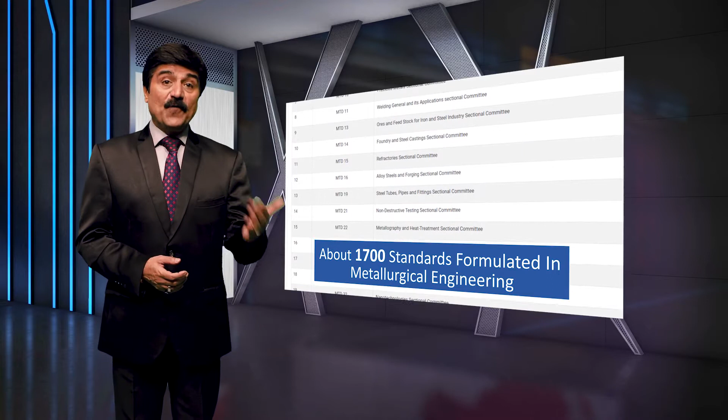Do you know about the standards specified for channels, beams, angles, rounds and other such products used in the construction industry? These products fall under the category of ferrous metallurgy. Let us take a look at the list of some important standards formulated in this category.

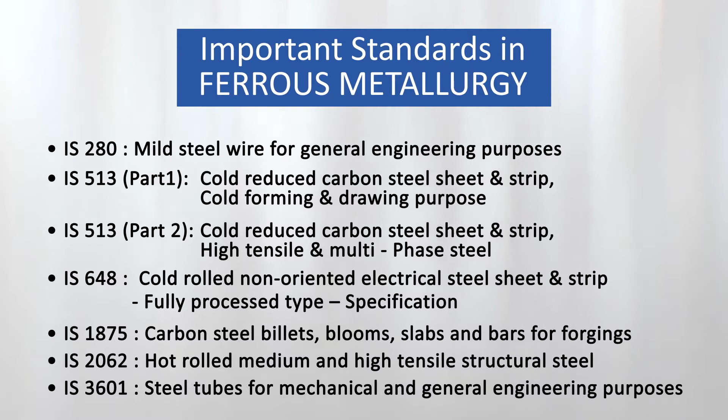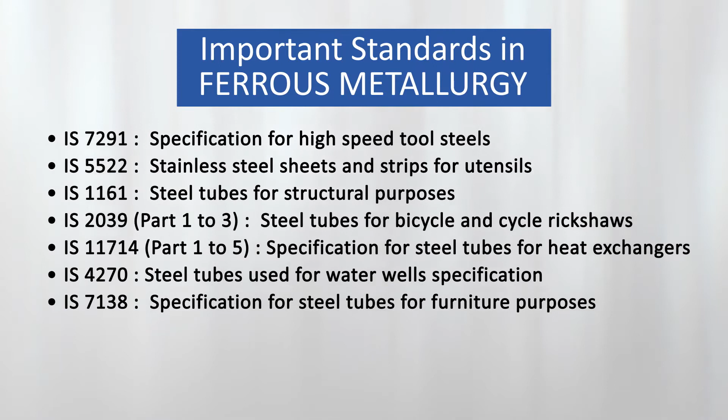Now let us hear from Shri Arun Puchakayala, scientist BIS, who talks about some of the standards in this category.

In the category of ferrous metallurgy, the standard IS 1239 Part 1 for steel tubes of sizes ranging from 6 mm to 150 mm covers the requirements of welded and seamless tubes intended for use in supply of water, non-hazardous gases, air and steam. The standard specifies requirements for chemical composition, mechanical properties comprising tensile strength, elongation, flattening test and bend test, and dimensional tolerances of pipes.

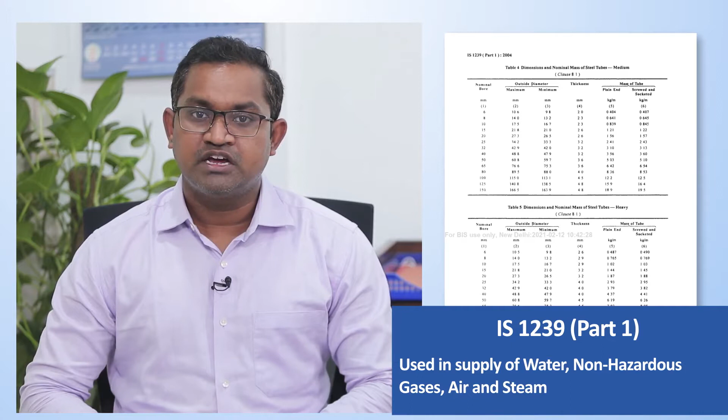This standard covers black pipes and galvanized pipes with enhanced resistance for corrosion, which can be supplied with either one or both ends socketed, with or without screw threads.

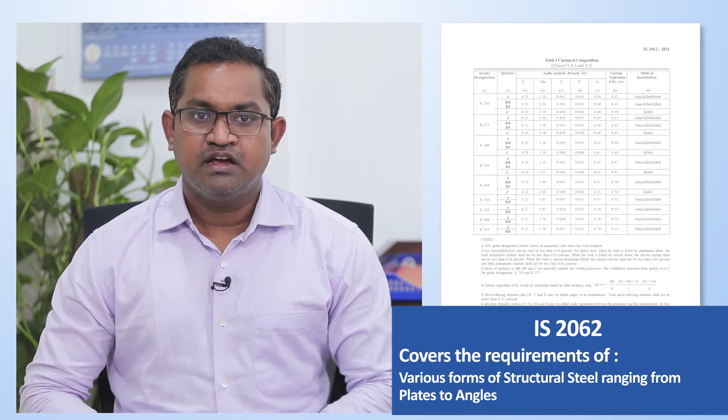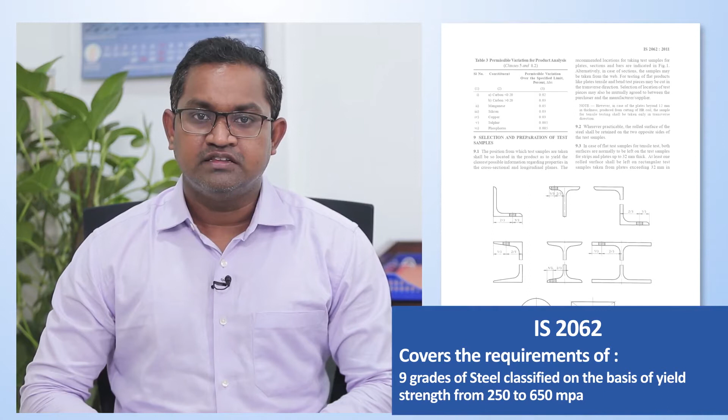Another standard, IS 2062 for hot rolled medium and high tensile structural steel, covers requirements of structural steels in various forms ranging from plates to angles. The standard prescribes chemical composition, mechanical properties comprising yield strength, tensile strength, elongation, bend test and impact test, and dimensional tolerances for 9 grades of steel classified on basis of yield strength ranging from 250 to 650 megapascals. These grades are also subclassified on weldability with improving quality from A to C.

This standard, IS 6911 for stainless steel sheet and strip, comprises steels resistant to corrosion and heat through addition of alloying elements with chromium as the principal alloying element. The standard specifies chemical composition, mechanical properties and dimensional tolerances for various grades of stainless steel, mentioned both on basis of designation and numerical symbols prevalent in industrial parlance.

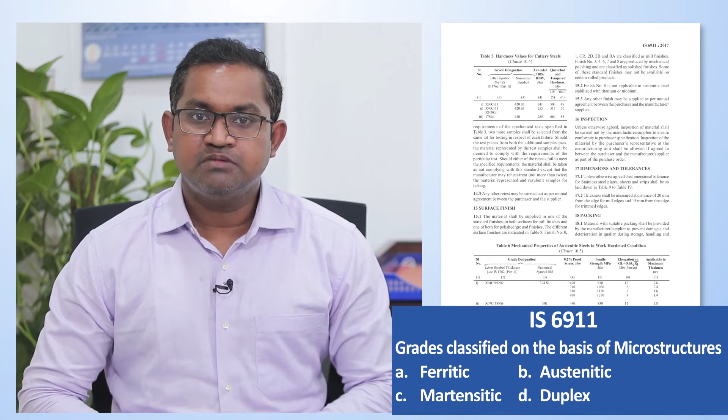The grades mentioned in the standard are classified into 4 types on basis of microstructure: ferritic, austenitic, martensitic and duplex, which can be supplied in different finishes catering to industry segments comprising food and catering, chemical and pharmaceutical appliances, medical equipment manufacturing, and architecture and construction.

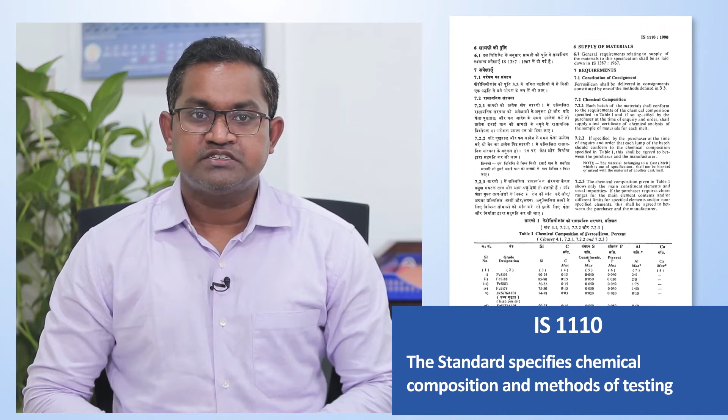The standard IS 1110-1990 consists of 12 grades of ferrosilicon, which is an alloy of iron and silicon with a typical silicon content by weight of 15 to 95%, used in production of steel. The standard specifies chemical composition including reference method of test for determining composition. In addition, it also subclassifies the product on basis of size designation besides defining lots on basis of homogeneity of heat in mixing the product for supply.

Let us have some more details about the standards from Shri Manish Kumar, one of the leading manufacturers of ductile iron pipes used for carrying water and gas. He is also a member of the technical committee that has formulated these standards.

As a pipe manufacturing company, our 2 main products are ductile iron pipes and mild steel pipes. They are primarily used in India for water application, wastewater application and oil and gas application. For the ductile iron pipes, we use IS 8329, which is the mother standard for the product. Then we use IS 3589, which is for the mild steel pipes. So these are the basic product standards for the two products I mentioned, ductile iron and mild steel.

But for each product there are other standards. To explain, I'll briefly give the references. For example, when we use the ductile iron pipe standard IS 8329, we also have to use reference standards, for example the laying standard of ductile iron pipes. Then we have to use standards for measuring different parameters within the dimensions of the pipes, sampling of the pipes, inside lining, outside coating, and the relevant standards applicable to these linings and coatings. Similarly for mild steel pipes, the mother standard IS 3589 gives the product's dimensions and relevant parameters, but for each type of lining and coating, various other related standards are also used.

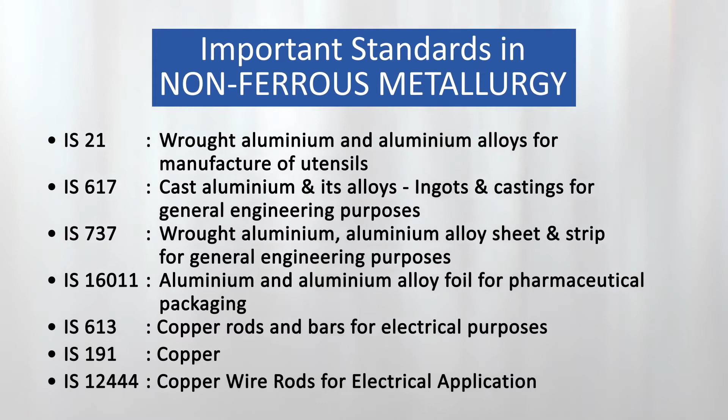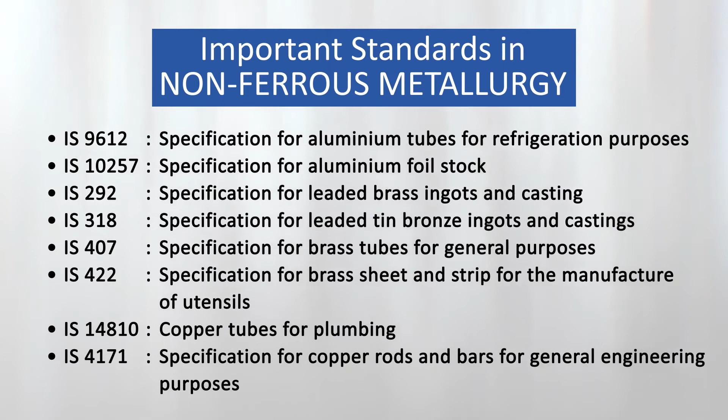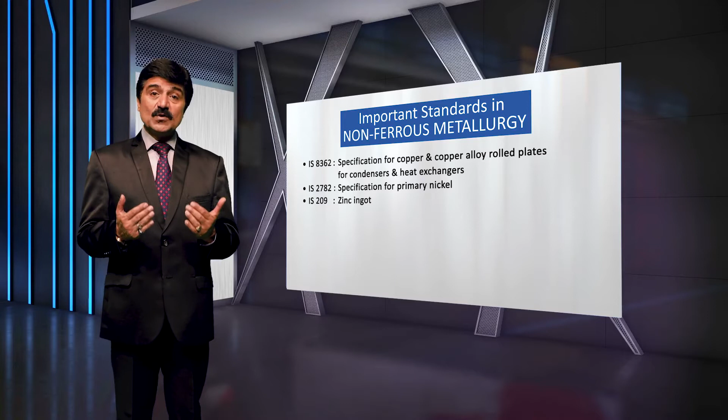However, do not think that metallurgy is all about ferrous products and its alloys only. There are many important standards and applications of non-ferrous products as well. A total of 215 standards have been formulated in the non-ferrous sector, comprising aluminium, copper, zinc, tin, nickel, lead, titanium, etc. These standards are used for manufacturing various electrical and food packaging products, corrosion protection and other applications. Now let us hear from Sri Ashok Kumar, Scientist at BIS, about some of the prominent standards in non-ferrous metallurgy.

Let me tell you about some of the important standards in the category of non-ferrous metallurgy. The standard IS 15392 for aluminum and aluminum alloy bare foil for food packaging specifies the requirement of aluminum foil used for food storage and packaging.

The standard contains the requirement of pinhole count, preferred thicknesses, dimensional tolerances, foil response to stress, and test of surface condition of the product for safe packaging and prevention of food from contamination.

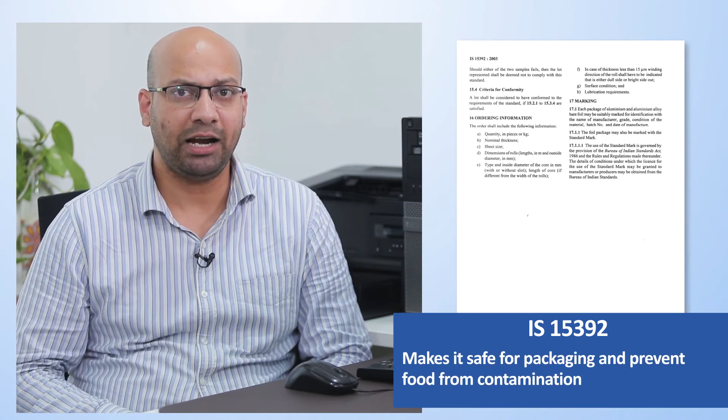The standard IS 12444 for continuously cast and roll electrolytic copper wire rod for electrical conductors covers the requirement of electrical conductor grade copper rod up to 18 mm in nominal diameter, produced by continuous casting and rolling for electrical round and rectangular conductor. The standard IS 21 for wrought aluminum and aluminum alloys for manufacture of utensils specifies the requirement of various grades of wrought aluminum and aluminum alloy sheets and strips used in the manufacture of aluminum utensils.

The standard contains the requirement of bend test, tensile test, and supply condition of grade of material used for making utensils. Another standard IS 13923 for lead seal specifications covers the requirements of the lead seal for sealing purposes.

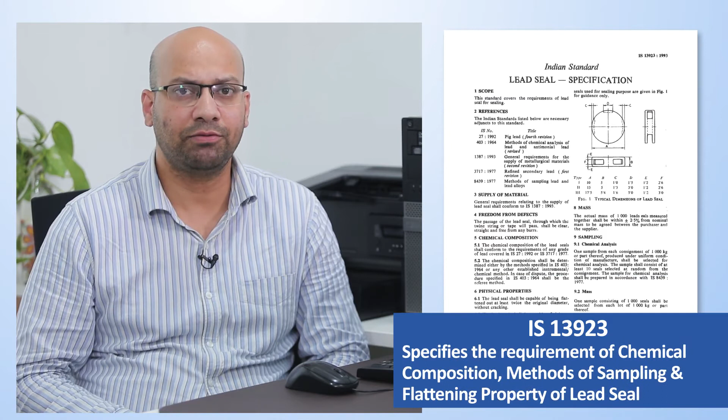It specifies the requirement of chemical composition, method of sampling and flattening property of the lead seal. For guidance purposes, the standard also specifies the typical dimensions for the lead seal used for sealing purposes.

I hope by now you know about the standards of many products made out of metals and their alloys that are used in our day-to-day life. Now let's talk about standards relating to various processes of metallurgical engineering.

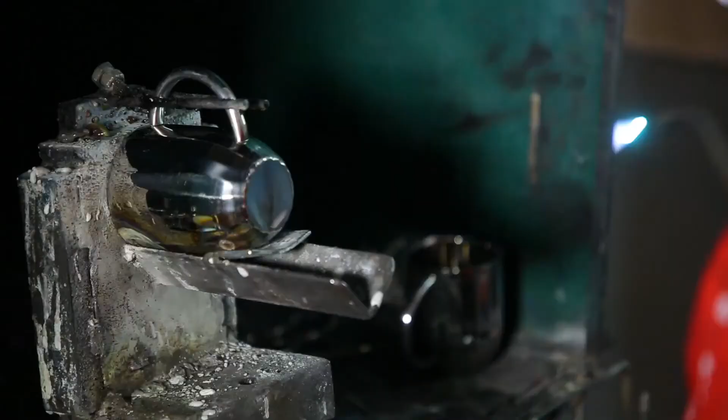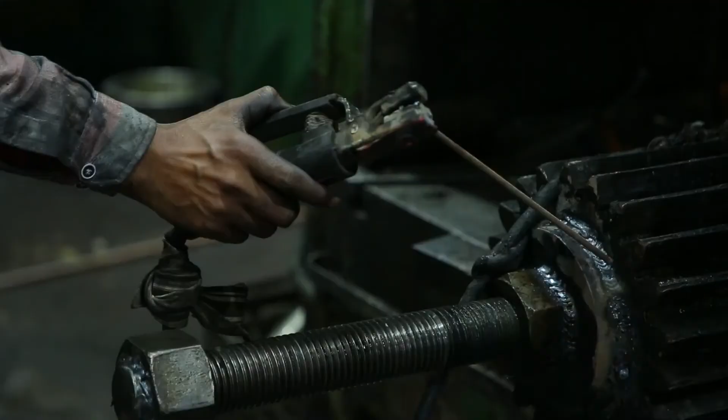One such process is welding technology. Welding is a metal joining process and is used in fabrication industry. Welding electrodes are used to fuse two metal pieces together. Depending upon the process of welding, the electrodes are either consumable or non-consumable.

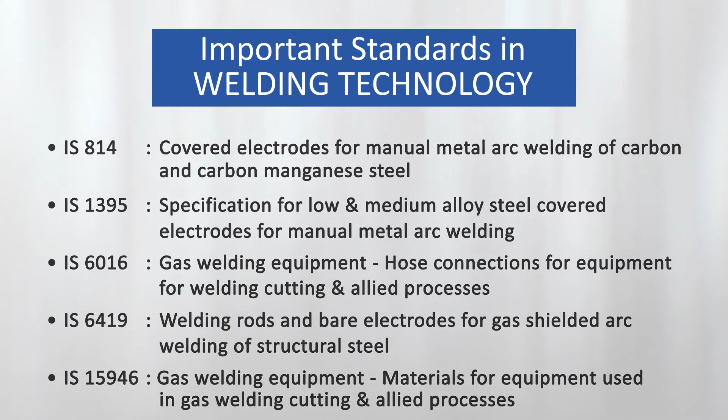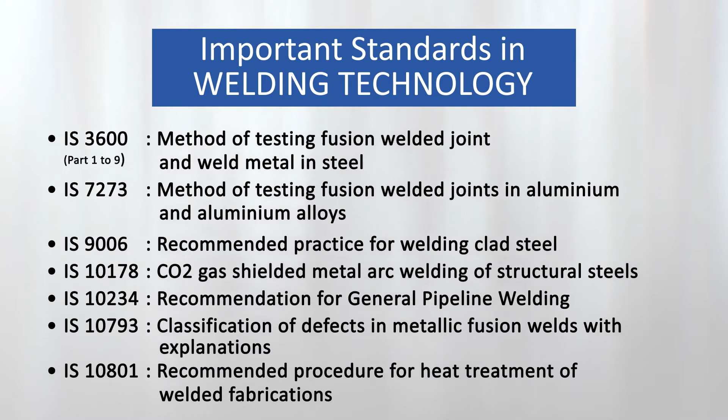BIS has formulated 111 standards in the welding category relating to jointing processes, materials and equipment used in jointing, training and safety of personnel, recommended procedures, method of tests for joining two or more similar or dissimilar metals by use of heat, pressure or both.

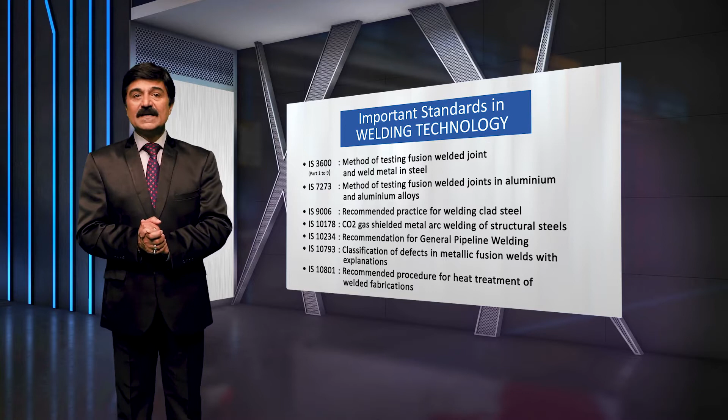Let us now know about some of the prominent standards in this sector from Shri Ram Sai Kumar, Scientist BIS. I am going to give the brief introduction of important standards in welding technology and applications.

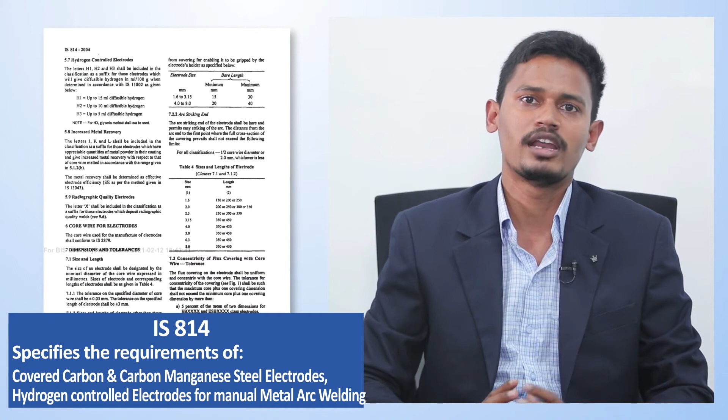In this category of welding technology, the Indian standard IS 814-2004 specifies the requirements for covered carbon and carbon manganese steel electrodes, including hydrogen controlled electrodes for manual metal arc welding of mild and medium tensile steel, including structural steels, and depositing weld metal having a tensile strength not more than 610 MPa.

The requirements include tensile strength, elongation, impact properties, dimensions and tolerances, chemical analysis and bend test. The standard also gives the information of weld slope, position and rotation.

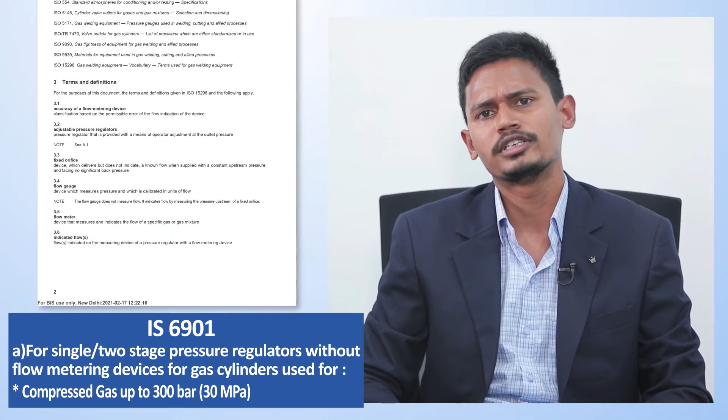The Indian standard IS 6901 for gas welding equipment specifies requirements for single and two-stage pressure regulators without flow metering devices for connection to gas cylinders used for compressed gases up to 300 bar, dissolved acetylene, liquefied petroleum gases, methyl acetylene, propadiene mixtures and carbon dioxide.

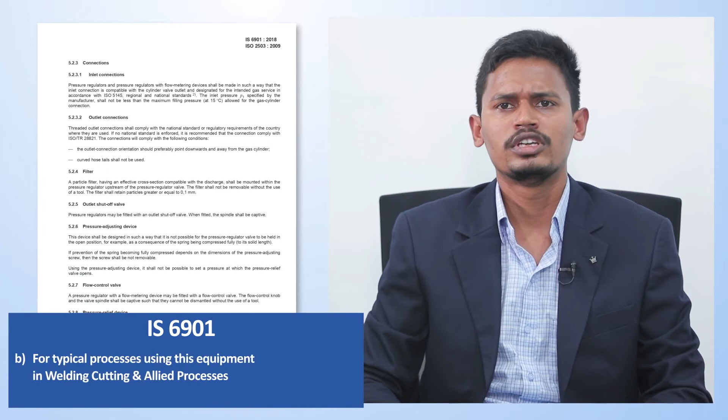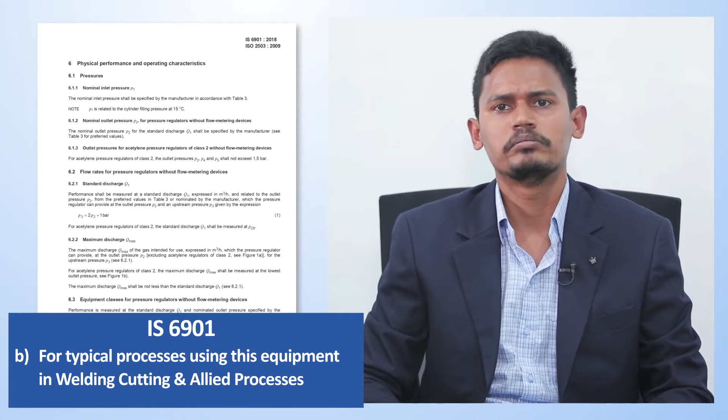For use in welding, cutting and allied processes, typical processes using this equipment are tungsten inert gas arc welding, metal inert gas arc welding, metal active gas arc welding, plasma arc welding, tubular cored wire welding and plasma cutting.

Another standard IS 6419 prescribes the requirement of solid filler rods and wires for structural steels by tungsten inert gas arc welding (TIG), gas metal arc welding or CO2 welding process. The chemical composition and mechanical properties of the filler wire and the rods are also specified.

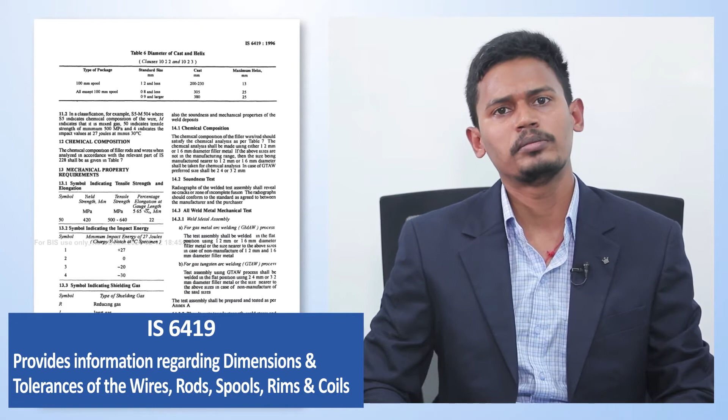IS 6419 provides information regarding dimensions and tolerances of the wires, rods, spools, rims and coils. It also prescribes mechanical properties requirements, tests for filler materials and chemical composition of the filler rods and wires.

Well, that was quite interesting to know, and I'm sure that the information disseminated here will be of tremendous value to you. Now let us move on to the Foundry Technology category.

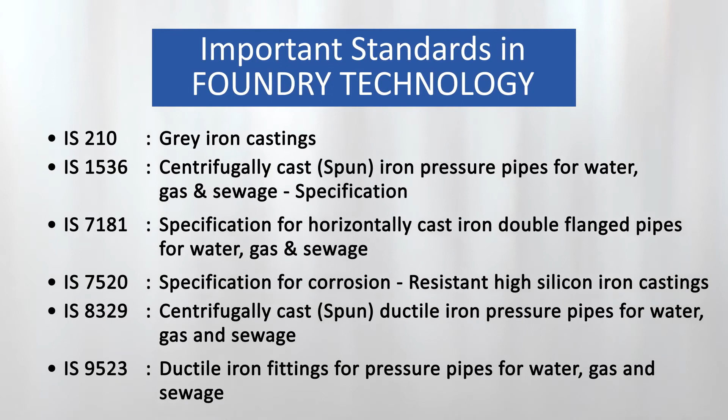Indian standards formulated on Foundry Technology comprise 165 standards on metal castings for various applications and materials used for casting, such as foundry sands, mold boxes, patterns, cores, etc.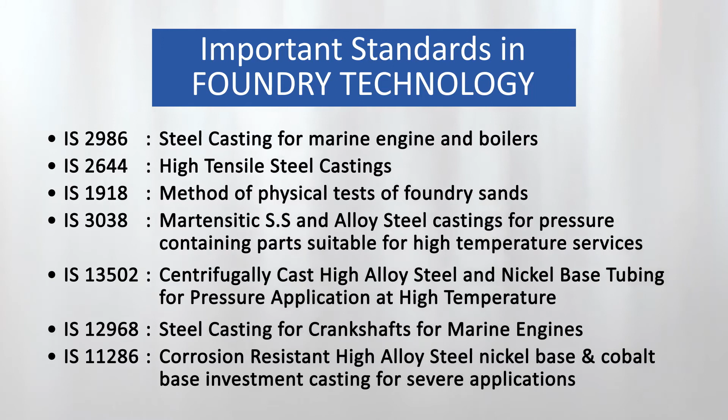Now let us hear from Shri Saqib Rahi, Scientist BIS, about some of the prominent standards in Foundry Technology. Let me tell you about some of the important standards in Foundry Technology category.

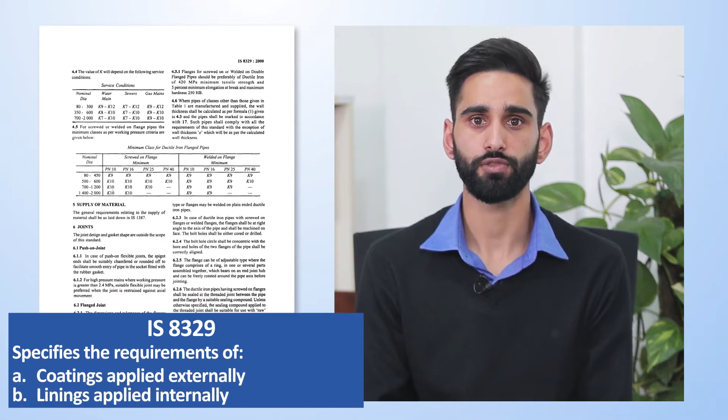IS 8329 for centrifugally cast ductile iron pressure pipes used for water, gas and sewage applications. This standard stipulates the requirements for tensile test, hardness test, hydrostatic test, dimensions and tolerances. The standard also specifies the requirements of coatings applied externally as well as the linings applied internally on the pipes.

The standard IS 1879 for malleable cast iron pipe fittings covers requirements for 14 types of threaded malleable cast iron pipe fittings for general purposes for the transmission of fluid and gas up to the certain limit of pressure and temperature specified in this standard.

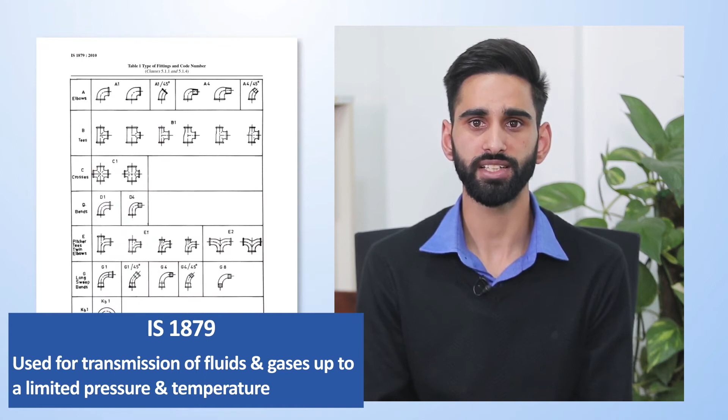This standard stipulates the requirements of pressure test for leakage testing and compression test to judge the malleability of the pipe fittings.

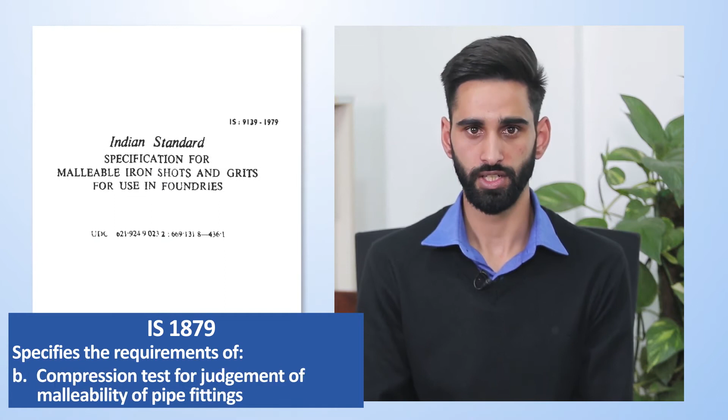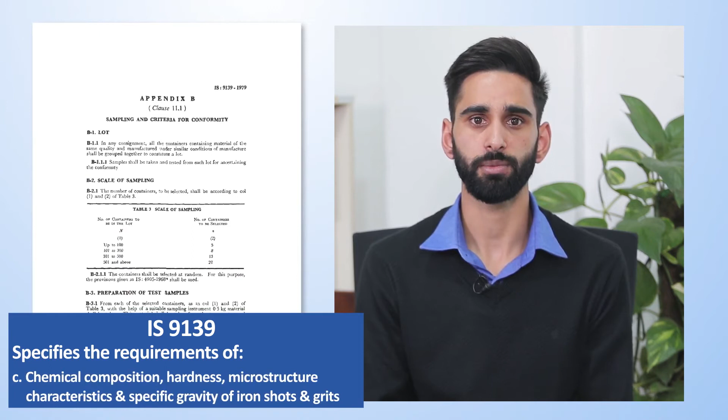The Indian standard IS 9139 for malleable iron shots and grits for use in foundry stipulates the requirements of malleable iron shots and grits as shot blasting machine abrasives. The standard covers requirements for designation of the size of grits and shots based on proportions retained and passed through sieves. It also mentions requirements of chemical composition, hardness, microstructure characteristics and specific gravity.

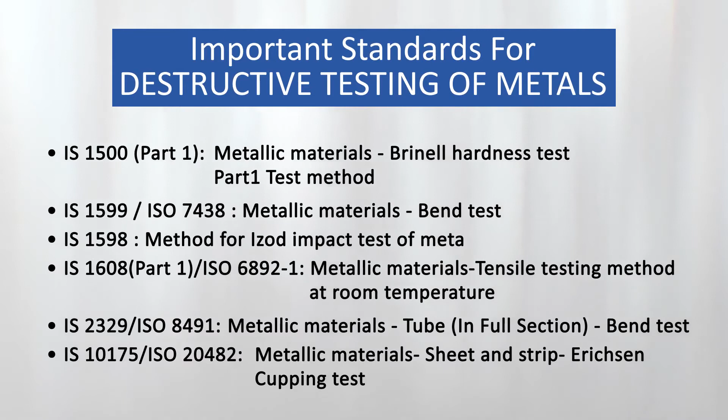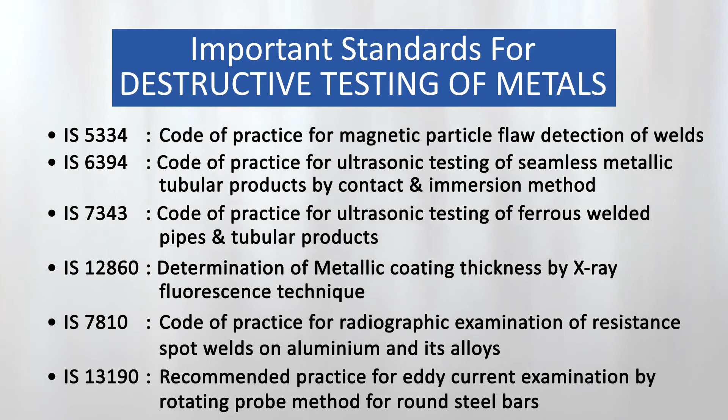After Foundry Technology, now let's talk about testing of materials. It's quite interesting to know that BIS has formulated standards on testing of metals too. 357 standards have been formulated in this category covering mechanical testing of metals, metallography, non-destructive testing, chemical analysis of metals, and code of practices on sampling and sample preparation.

Now let us hear from Sri Akshay Kaushik, scientist BIS, about some of the prominent standards on testing of metals.

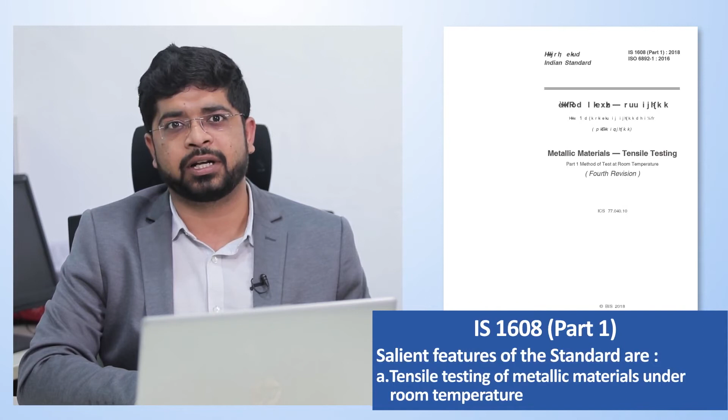In the category of testing of materials by destructive and non-destructive methods, the Bureau of Indian Standards has published many standards. IS 1608 Part 1 is the specification for tensile testing of metallic materials under room temperature. Tensile properties of materials such as yield strength, tensile strength and elongation are useful to determine their mechanical performance, vis-a-vis furnishing limits for designing structures. Tensile strength is measured by elongating a specimen in a UTM, that is, Universal Testing Machine.

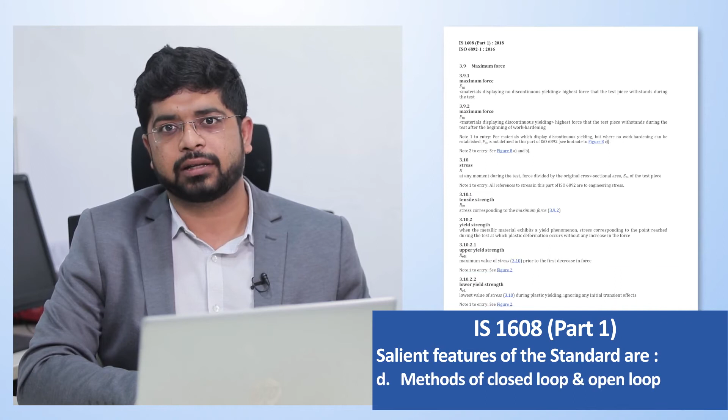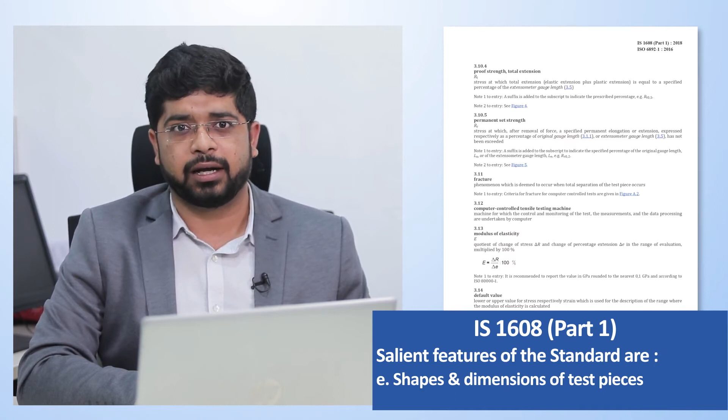Methods of closed loop and open loop for carrying out the test have been specified in the standard. The shapes and dimensions of test pieces are also defined in this standard. In this method, the specimen is held on the opposite ends using clamps with one of the ends remaining stationary, while pulling the other with real-time monitoring of the forces.

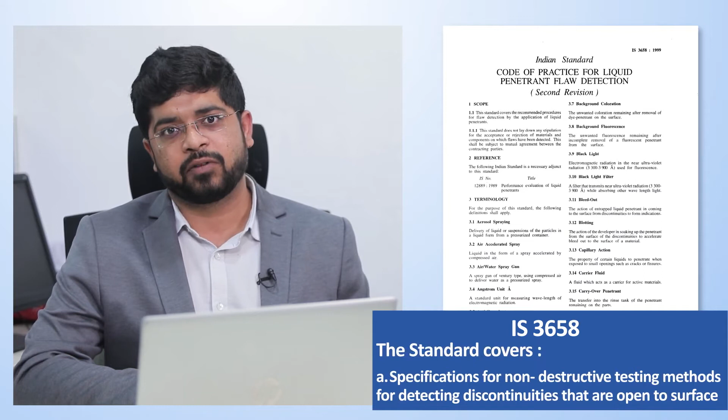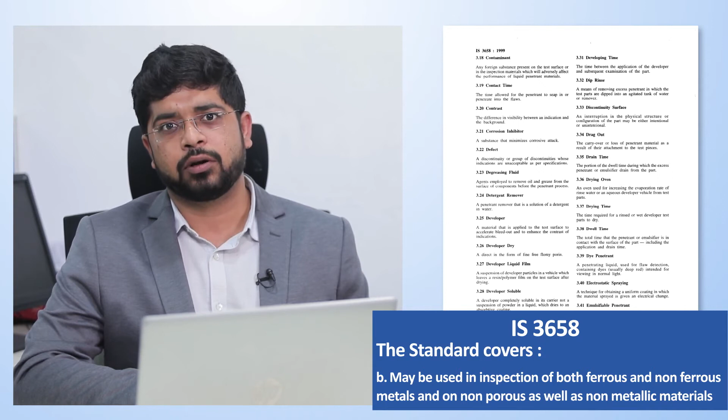IS 3658 is the standard on the code of practice for liquid penetrant flaw detection test. Liquid penetrant processes are non-destructive testing methods for detecting discontinuities that are open to surface. They may be effectively used in the inspection of both ferrous and non-ferrous metals and on non-porous, non-metallic materials such as ceramics, plastics and glass.

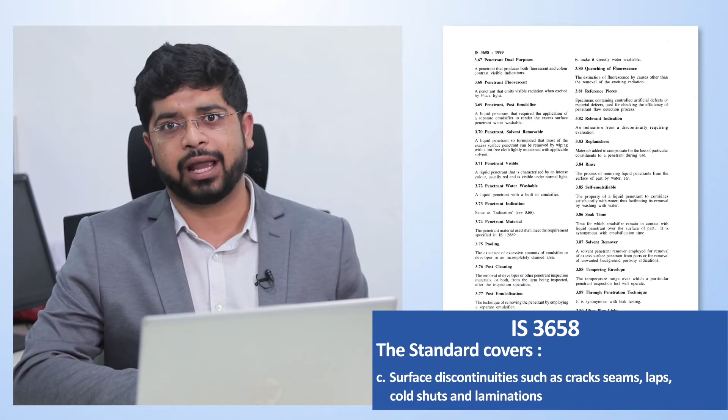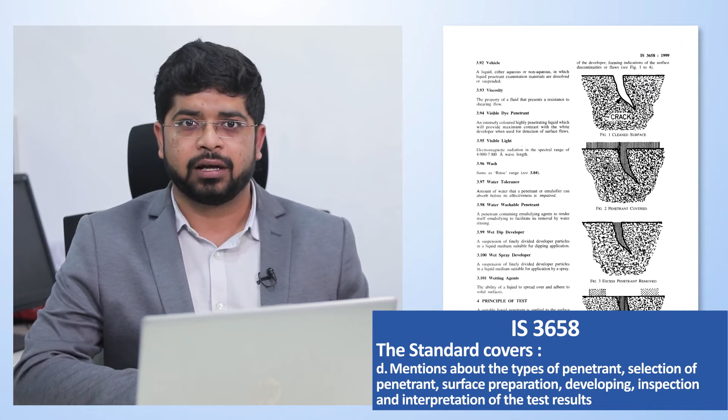Surface discontinuities such as cracks, seams, laps, cold shuts and laminations are indicated by these methods. The standard mentions types of penetrant, selection of penetrant, surface preparation, developing, inspection and interpretation of the test results.

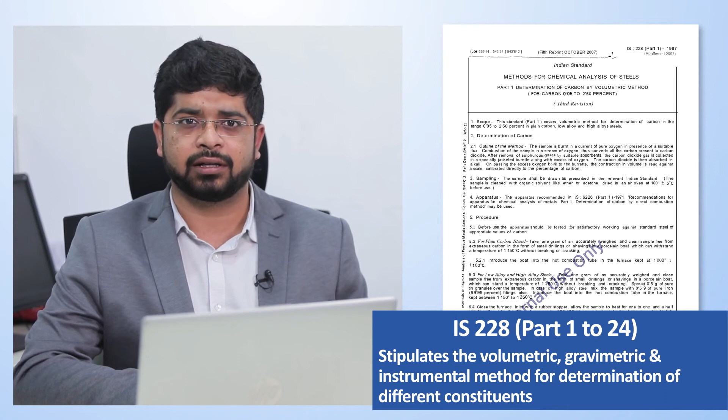Another standard in this category is IS 228 Part 1 to 24, which stipulates the volumetric, gravimetric and instrumental methods for determination of different constituents in steel such as carbon, manganese, phosphorus, nickel, chromium, molybdenum, silicon, sulfur, arsenic, copper, tungsten, nitrogen, oxygen, etc.

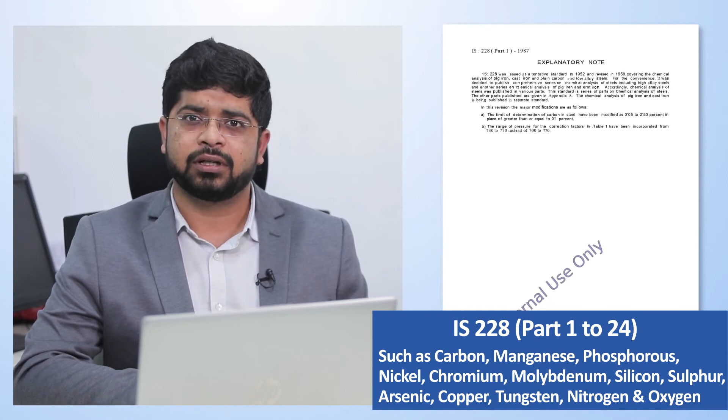Gold has fascinated Indians from ancient times for reasons of its intrinsic value and reverence attached to it during auspicious occasions. Gold is also a popular investment choice for majority of the population.

In order to protect the consumer against any adulteration of gold and gold jewelry, Bureau of Indian Standards started the hallmarking scheme of gold jewelry in the year 2000 that guarantees the purity or fineness of gold jewelry and gold articles. The hallmarking scheme for silver and silver articles was later introduced in the year 2005.

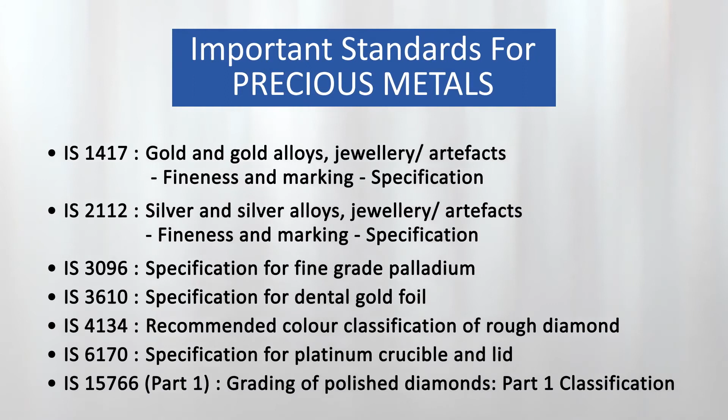61 standards have been formulated in this category covering gold, silver, platinum and their alloys and diamonds, including methods of assaying precious metals, recommended practices for manufacturing, and requirements to assess competence of hallmarking centers, etc.

Sri Akshay Kaushik, scientist BIS, gives us more details about some of the prominent standards on precious metals.

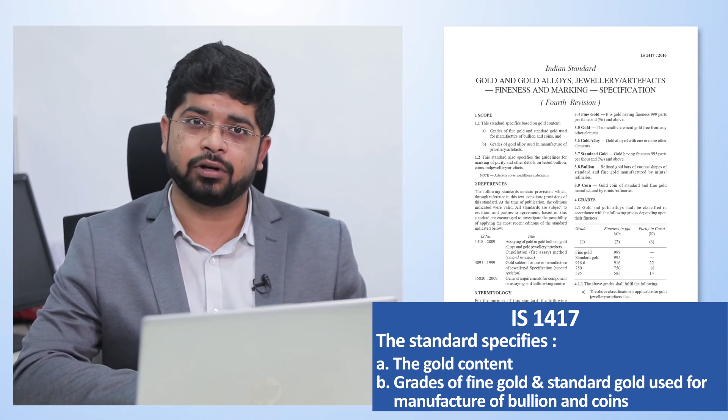Now let me briefly describe some of the important standards in the precious metal category. IS 1417 on gold and gold alloys for jewelry or artifacts specifies, based on gold content, grades of fine gold and standard gold used for manufacture of bullion and coins, and grades of gold alloy used in manufacture of jewelry or artifacts. This standard also specifies the guidelines for marking of purity and other details on tested bullion, coins and jewelry or artifacts.

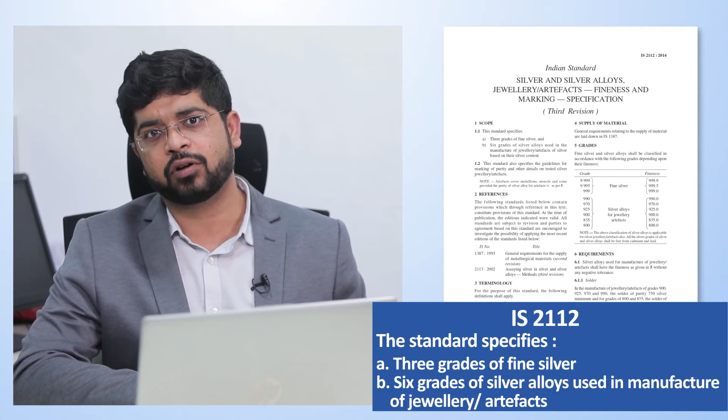Similarly, IS 2112 on silver and silver alloys, jewelry or artifacts specifies 3 grades of fine silver and 6 grades of silver alloy used in the manufacture of jewelry or artifacts of silver based on their silver content. This standard also specifies the guidelines for marking of purity and other details on tested silver jewelry or artifacts.

IS 15820 covers general requirements for competence of assaying and hallmarking centers such as management requirements, technical requirements, list of equipments and reagents for assaying of silver as well as gold and hallmarking of gold or silver jewelry.

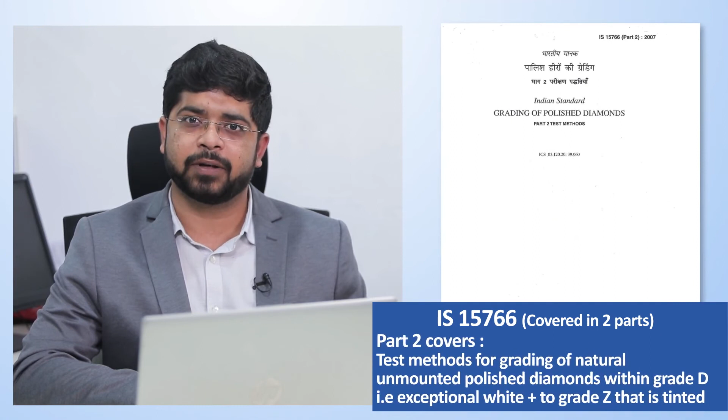Next standard, IS 15766, is covered in 2 parts. The first part specifies the terminology and classification that shall be used for the grading and description of polished diamonds. The second part specifies test methods for grading of natural unmounted polished diamonds within the grades D, that is exceptional white plus, to grade Z, that is tinted series, as well as the grading criteria other than for the color of naturally colored diamonds.

After the precious metals category, let us now know about the standards formulated in the segment of refractories and powder metallurgy.

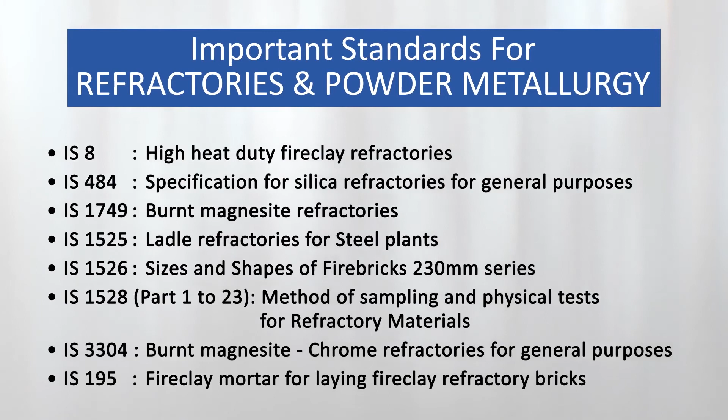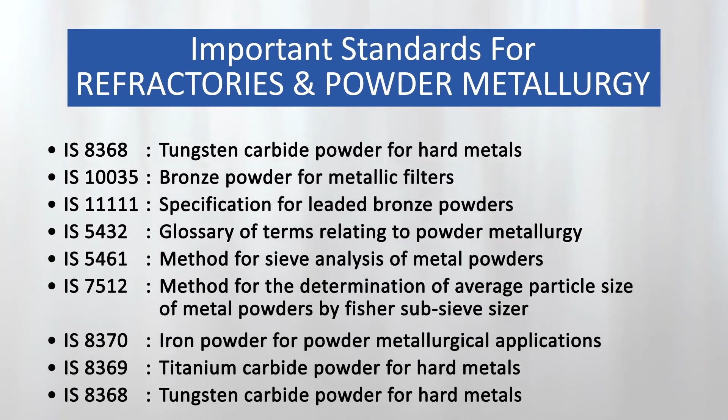A total number of 156 standards have been formulated in this category, covering refractories used in various furnaces and ladles, and metallic powders produced through powder metallurgical route for various applications. These standards also include methods of sampling and physical tests for determination of properties of refractory materials and metallic powders.

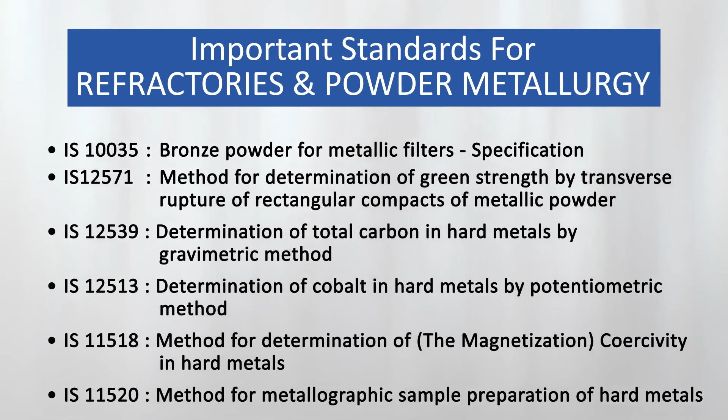Now let us hear from Shri Dushyant Havelikar, Scientist BIS, about some of the prominent standards of this sector.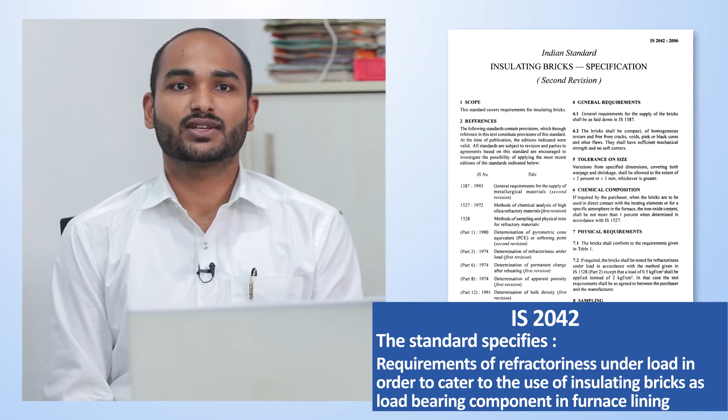In the category of refractories and powder metallurgy, we have published many standards. The standard IS 2042 for insulating refractory bricks stipulates the requirements of refractoriness under load, in order to cater to the use of insulating bricks as load-bearing component in furnace lining.

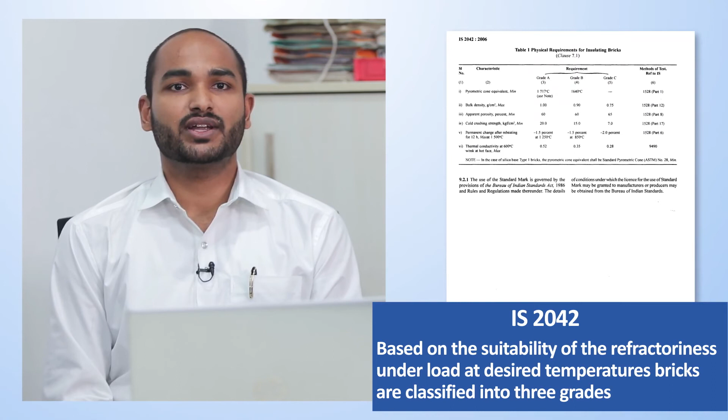Based on the suitability of the refractoriness under load at desired temperatures, refractory bricks have been classified into 3 grades. Grade A is suitable for temperature up to 1500 degrees Celsius. Grade B is suitable for temperature up to 1250 degrees Celsius. Grade C is suitable for temperature up to 850 degrees Celsius.

The Indian standard IS 8370 specifies requirements for iron powder for use in the manufacture of sintered bearings and parts. The standard specifies 2 grades of iron powders, complying with the requirements stipulated for physical properties comprising apparent density, size distribution on basis of sieve analysis, compressibility and flow rate.

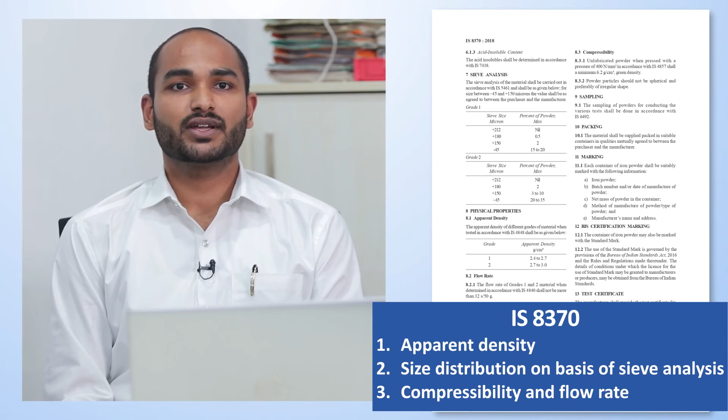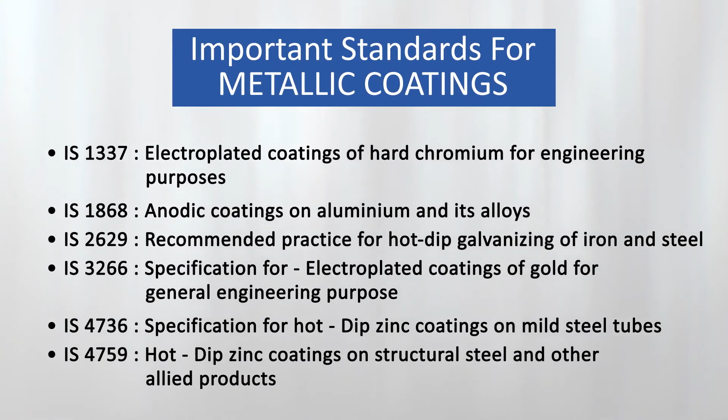It's also quite interesting to know that BIS has formulated standards of steel products that are coated with metallic coatings. These coatings protect the product from corrosion and give them a higher shelf life. A total number of 119 standards covering corrosion, passivation and protection of metals, and characteristics of protective and decorative metallic coatings applied by electrolysis, anodizing or hot dipping, have been formulated.

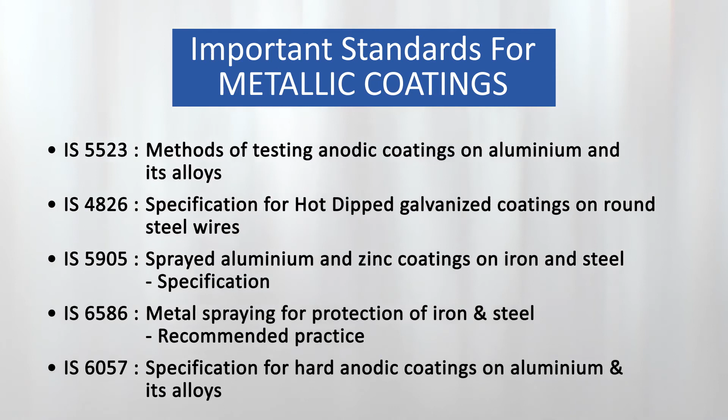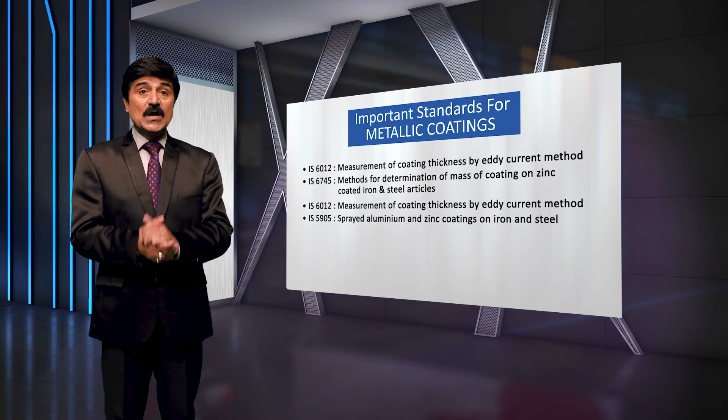Let's hear from Shri Vishal Kumar, Scientist BIS, who describes some of the prominent standards in this category.

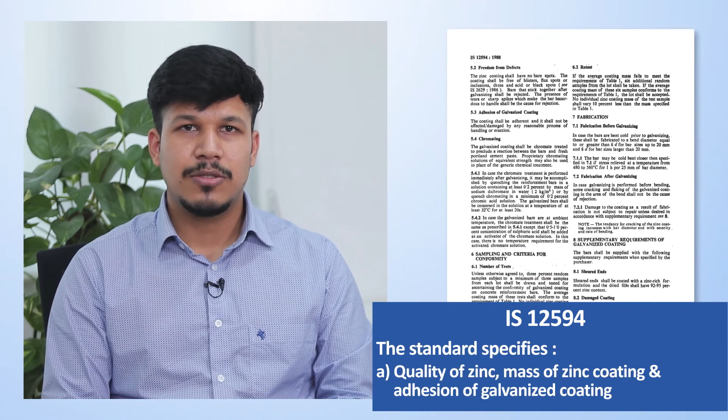In the metallic coating category, BIS has published many standards, out of which we shall describe some of the important ones here. The standard IS 12594 specifies requirements for zinc coating applied by hot dip galvanizing on structural steel bars. Some of the important requirements covered in the standard are quality of zinc to be used for coating, mass of zinc coating on the bars, and adhesion of galvanized coating.

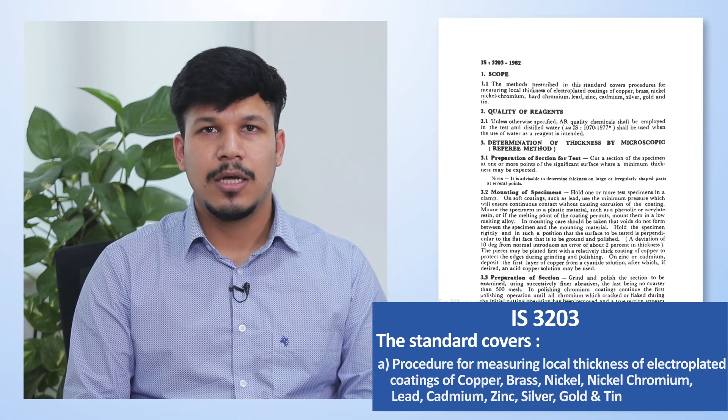The Indian standard IS 3203 is a test method standard, and methods prescribed in this standard cover procedures for measuring local thickness of electroplated coatings of copper, brass, nickel chromium, lead, zinc, cadmium, silver, gold and tin using various methods such as microscopic method, magnetic method, BNF jet test method and stripping method, etc.

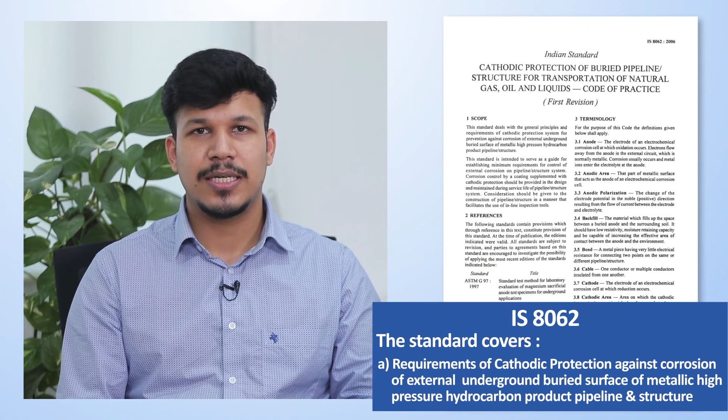The standard IS 8062 deals with the general principles and requirements of cathodic protection system for prevention against corrosion of external underground buried surface of metallic high pressure hydrocarbon product pipeline and structure. This standard is intended to serve as a guide for establishing minimum requirements for control of external corrosion on pipeline and structure systems. Corrosion control by a coating supplemented with cathodic protection should be provided in the design and maintained during service life of the pipeline or structure system.

You are welcome to have more details on the standards discussed here on our standardization portal eBIS.

We hope by now you've got enough information about the Indian standards that are being formulated by BIS in the area of metallurgical engineering. BIS is in the process of formulating new standards to meet the latest challenges of changing technologies. Let's hear from Sri Surya Narayan, head of the Metallurgy department, about the standards being formulated in emerging areas.

In pursuance of catching up with trends in emerging technologies, Bureau of Indian Standards has formulated standards relating to electro-galvanized steel sheets, refined gold and silver bars for good delivery, and is currently in the process of formulating standards relating to wear and abrasion resistant steel, armor steel, triple clad material, and induction tempered spring steel wire.

Standard formulation plays an important role in the economy of a nation, and it is therefore a continuous exercise to update the existing standards and to formulate new ones to meet the challenges of changing technologies.